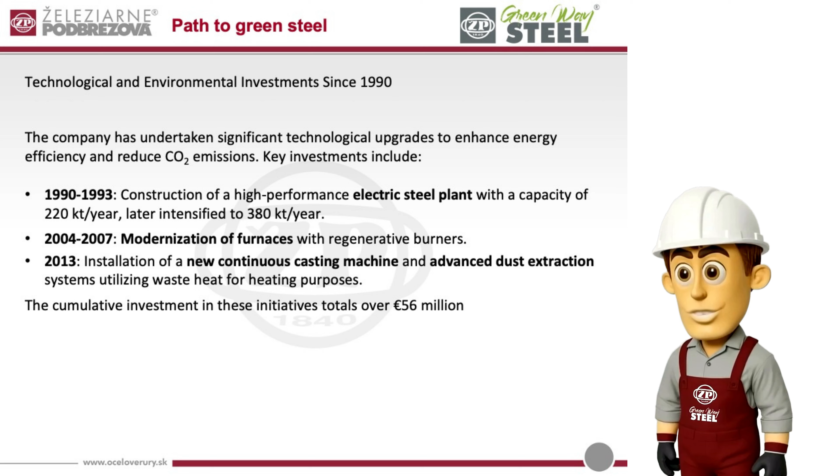In 2004 to 2007, the focus shifted to modernizing furnaces with regenerative burners, boosting thermal efficiency and lowering fuel consumption. A major investment followed in 2013 with the installation of a new continuous casting machine and advanced dust extraction systems, which also make use of waste heat for heating purposes. Together, these strategic upgrades represent a cumulative investment exceeding €56 million, supporting the company's ongoing transition toward more sustainable steel production.

ZP has improved air quality and expanded renewable energy use under its 1999 environmental policy. Key actions include a high-efficiency cogeneration unit producing 33,000 megawatt-hours per year of electricity and steam, modernization of 4 hydropower plants, generating 26,000 megawatt-hours annually, and Slovakia's largest rooftop solar plant with 7,100 panels and 3,350 kilowatt peak capacity. Total environmental investments exceed €15.5 million.

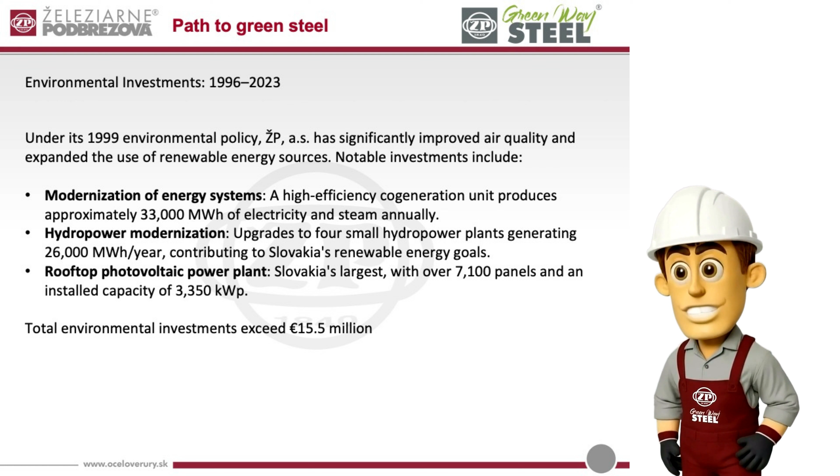In December 2020, EU leaders adopted a bold target: a 55% reduction in greenhouse gas emissions by 2030 compared to 1990 levels. ZP has already exceeded this goal. Thanks to sustained investments and energy efficiency efforts, we have successfully reduced all direct CO2 emissions by 67% as of 2023. This achievement reflects our long-term dedication to sustainability.

Since 1990, we have invested nearly €72 million from our own resources into clean technologies, low-emission processes, and renewable energy, reaffirming our commitment to going beyond the targets of the European Green Deal, 55%.

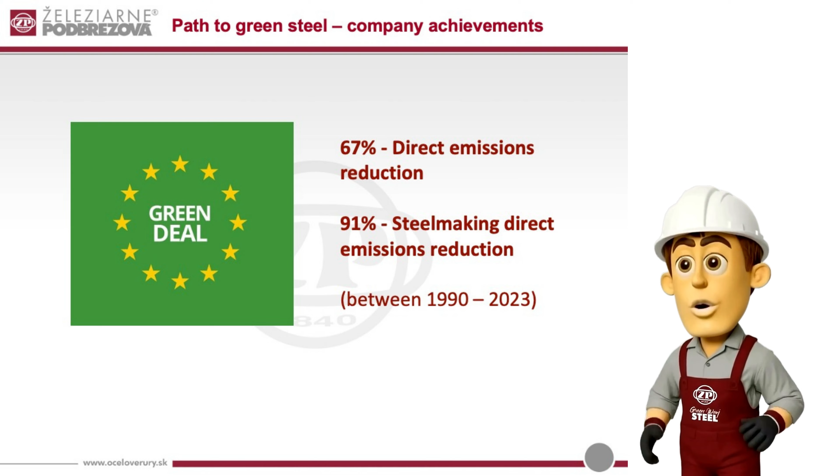In line with the EU Green Deal and the company's environmental strategy, ZP has achieved an impressive recycling rate of over 96% for its steel production in the last year. 80% of the recycled steel scrap came from external sources, while 20% was generated internally.

All of the scrap is sourced within a 250-kilometer radius of the production plant, minimizing transport emissions and environmental footprint. This approach reflects ZP's long-term commitment to local circular economy principles, resource efficiency, and low-carbon steelmaking. The entire process is carried out using an electric arc furnace aligned with EU taxonomy for sustainable activities.

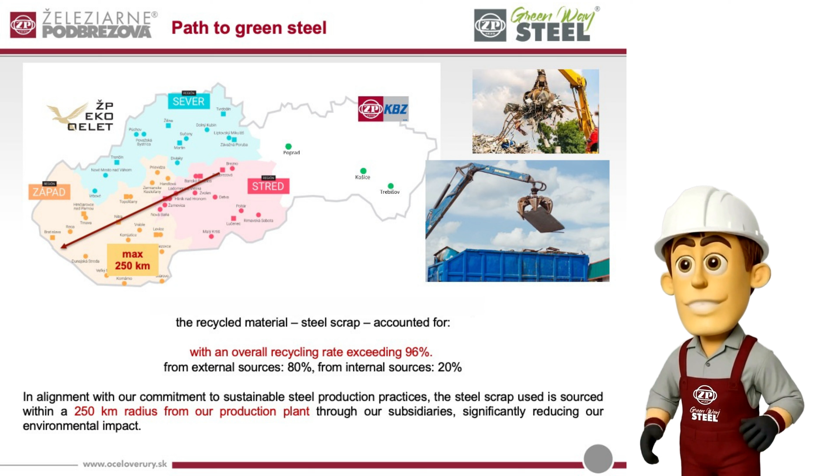In the vicinity of the company, 5 hydropower units across 4 sites have been supplying renewable electricity for decades. Together, they produce around 26,000 megawatt-hours annually, covering 20% of ZP's total electricity consumption. These plants ensure a stable, clean, and efficient energy source, contributing significantly to the company's decarbonization goals.

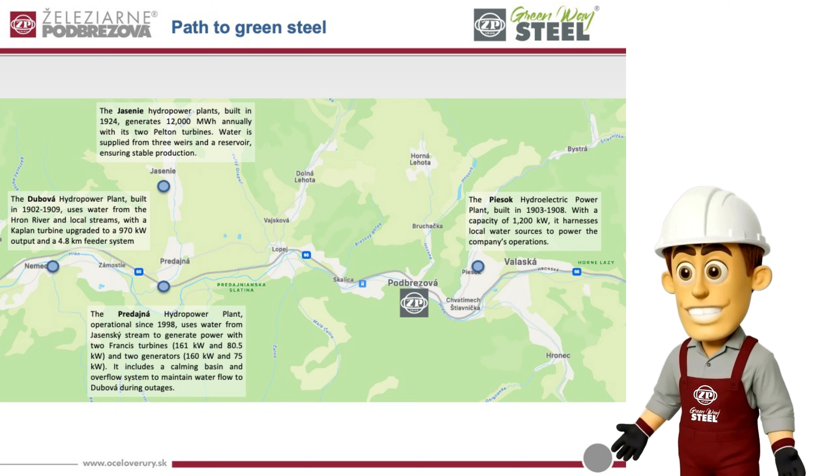Beyond their energy performance, the hydropower plants hold historical and architectural significance, harmoniously integrated into the natural landscape. Thanks to ongoing modernization, they deliver long-term operational reliability and environmental value, preserving both industrial heritage and climate responsibility for future generations.

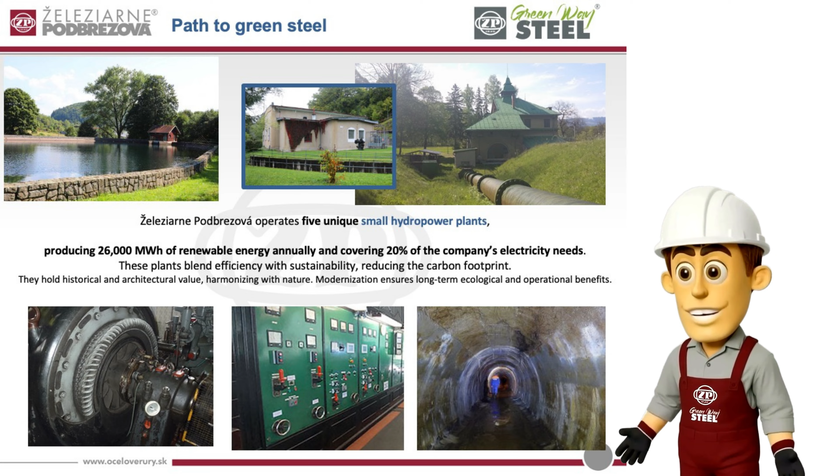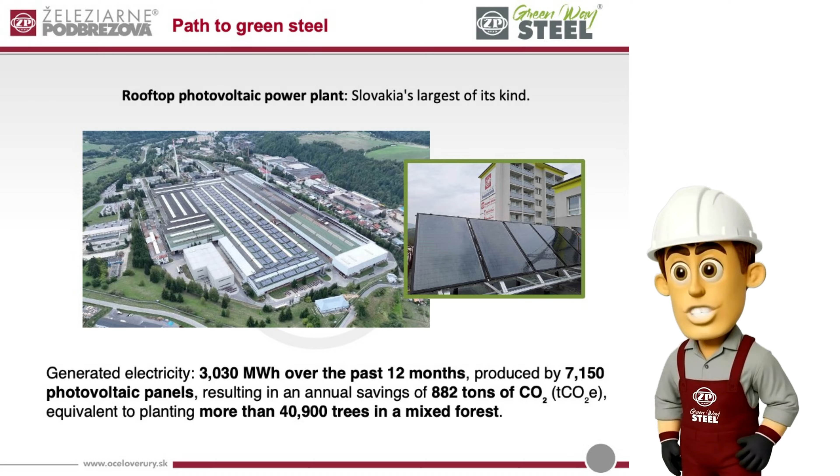The company operates Slovakia's largest rooftop photovoltaic installation with over 7,100 panels. In the last 12 months, it generated 3,030 megawatt-hours of electricity, reducing CO2 emissions by 882 tons, equivalent to planting over 40,000 trees. This investment highlights our commitment to low-carbon energy and sustainable steel production.

At ZP, slag, namely a byproduct of steelmaking, is recycled into valuable construction materials. It is used in road bases, asphalt, concrete, and railway bed layers. This approach reduces industrial waste and supports sustainable infrastructure development, making steel production more environmentally responsible.

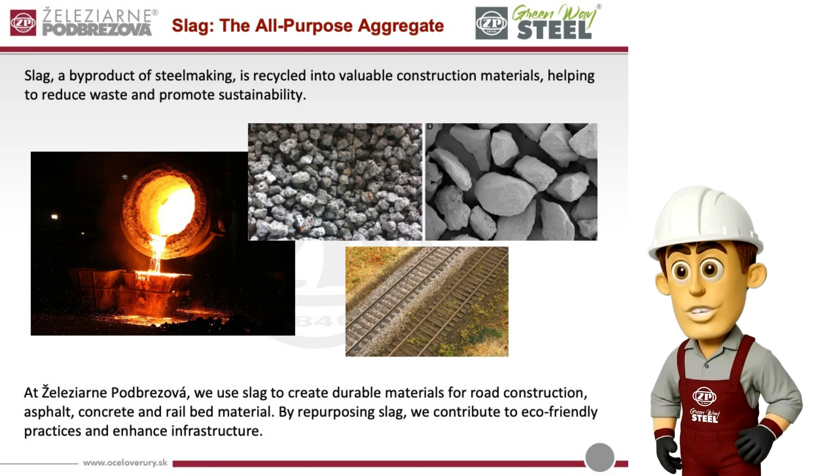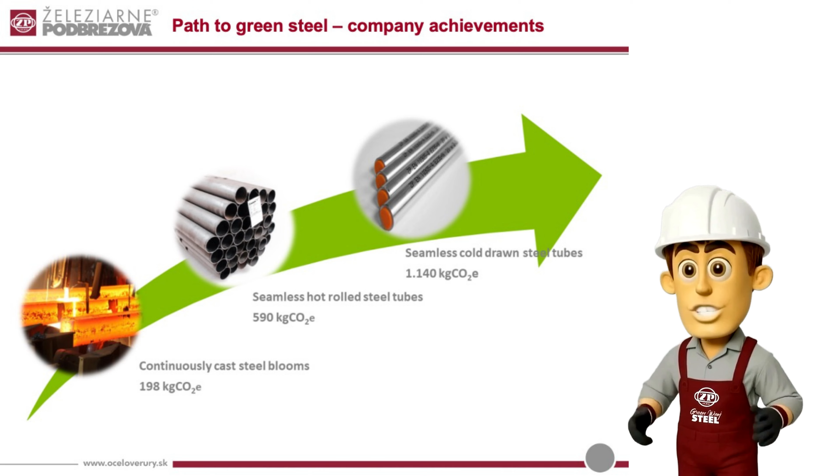This chart shows the carbon footprint of our main products, from steel blooms to finished tubes. We start with continuously cast blooms at 198 kilograms of CO2 equivalent, moving up to hot-rolled tubes at 590 kilograms and cold-drawn tubes at 1,140 kilograms per ton. Even though each production step adds complexity, we maintain an efficient and low-emission process across the entire chain, fully aligned with our green steel strategy.

Upon request, ZP provides a declaration of conformity, confirming that products are manufactured in line with the Green Way Steel Certification Scheme. This ensures that your goods are produced using top-quality steel billets sourced from a process committed to energy efficiency, recycling, and environmental responsibility.